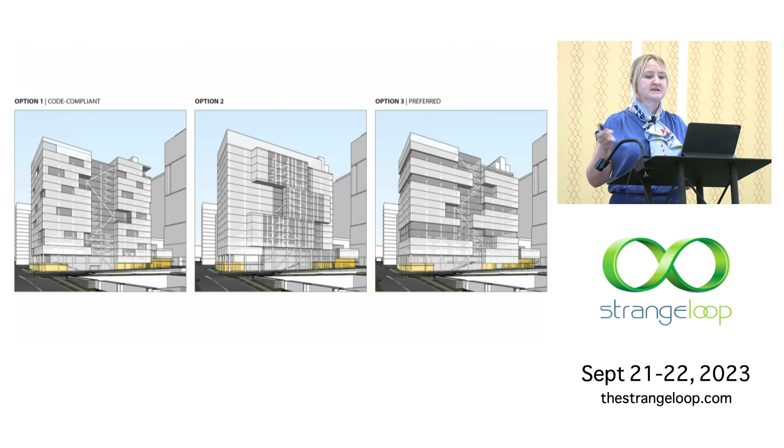Something that you'll commonly see is that 2 or 3 design options are identified upfront and then developed in parallel. And yes, having 2 or 3 design options is good, but you have to wonder what sorts of possibilities are unlocked if you could explore 100 or 1,000 options in the time it currently takes to explore one. And that idea is really at the crux of the work that we've been doing.

What if there's a better way to design buildings where the fundamental rules about how a building should manifest are encapsulated in a repeatable process that can be run in seconds, while still preserving the ability to express complicated and compelling forms. Nobody wants to live in a world full of boring rectangular boxes. So whatever work we do needs to support variety in form, and a lot of different aesthetics.

So I'm going to take a short detour for a moment and just talk about something that's provided a lot of inspiration for me over the past 10 years, which is trees. Monterey cypress trees in particular. Has anyone here ever been to the central coast of California, like Monterey or Big Sur, Carmel? Yeah, a lot of people. It's a really beautiful place.

And Monterey cypress trees are really common along the Central Coast. You really can't go far without seeing one. And I think it's one of the most beautiful trees on the planet. And what makes it beautiful to me is that the Monterey cypress, more than most any other tree, really expresses uniqueness by adapting to place.

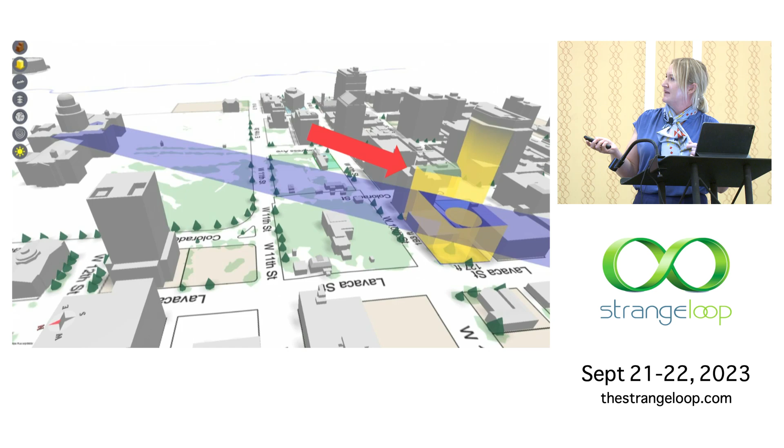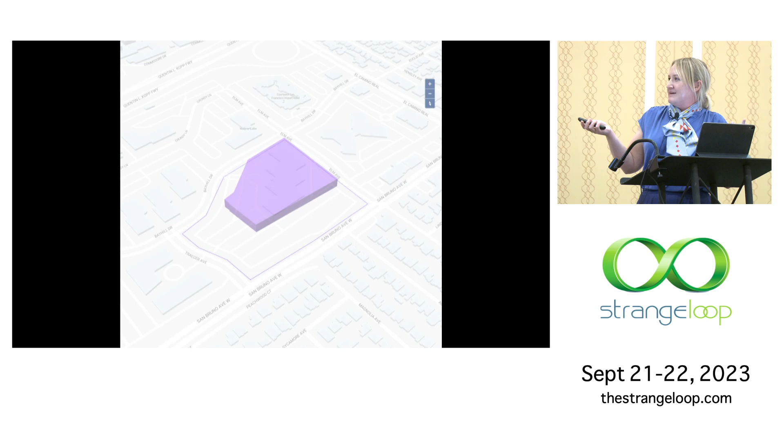You can see there's a cylindrical cutout because there's what's called a heritage tree. There's planes of different heights, and then you have this blue plane that's actually called a view corridor, because this building in particular was near the Austin Capitol building, and so you couldn't block the view there. But more often than not, they actually look more like this, a lofted polygon with varying setbacks from the lot edges.

So the next step after you understand site constraints is typically determining what's called the program for a building. This basically says how much and what sort of space should be included. Like in our case, how much desk area, how many conference rooms, what sort of conference rooms, what sort of amenities. Is this building going to have a cafe or bicycle storage, et cetera.

And then once you have your site constraints plus your building program, you can start exploring building form. And this is where architectural creativity really shines and comes into play. I'll do a deeper dive on this in a few minutes, but it's a really cool area.

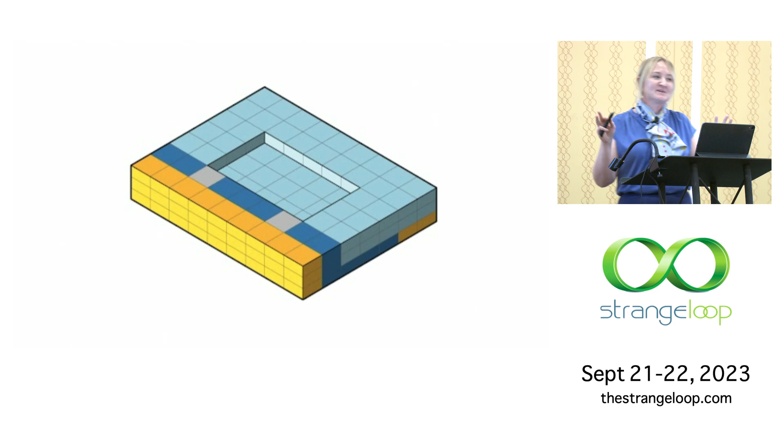At the same time that we're exploring form, we're also doing what's called a macro layout. This defines roughly what parts of the building are going to be used for what. Here it's color-coded: light blue is office space, dark blue is meeting space, yellow is amenity spaces.

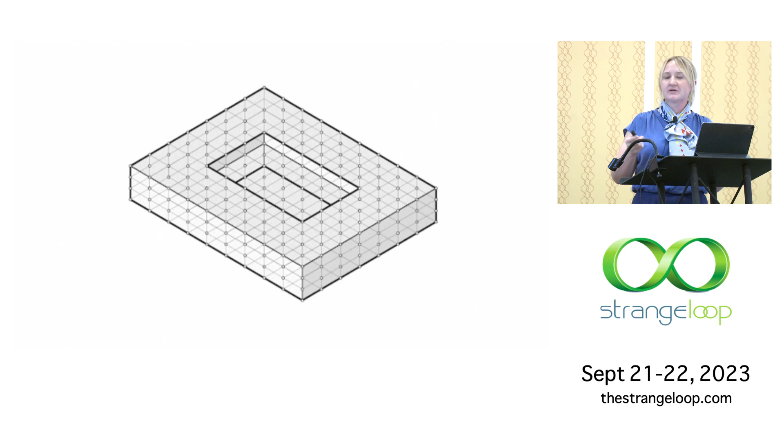Once a form and macro layout are identified, the next step is to establish the structural grid and structural member sizing for a building. You want to determine how large are the beams and columns. Next, totally separate from their physical locations in space, elements of the MEP system, so mechanical, electrical, and plumbing, are sized. What we're trying to figure out here are things like how large does an air handling unit need to be, or a boiler or chiller for a building.

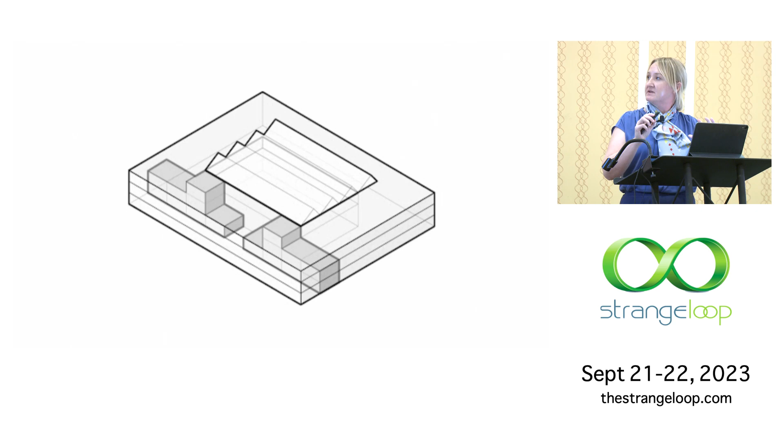Once we know how large the elements of an MEP system need to be, we can start to place them in physical space in what's called the building core, along with the vertical transport and stairs, so elevators, stairs, things like that. The next step is to take the secondary, smaller core items and place those in the building, typically adjacent to the larger primary building core.

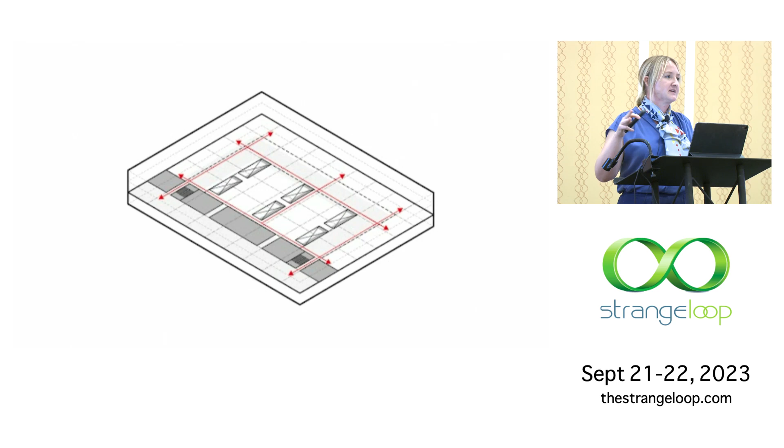With these major pieces in place, we can start to think about the layout of the space. We first start with primary circulation, that's the red lines here, and then we also think about secondary and tertiary circulation. Once that's designed, we lay out the space with the contents of the program. Because we're working on office spaces, we start with the workspace itself, the desks and where people actually get their work done. Then we layer on top of that conference space, amenity space, and other things like that.

And finally, there's typically a step related to seismic design, where the structural system has additional pieces added to it, typically either moment frames or shear walls, depending on the structure type. This is to protect the building in case of an earthquake.

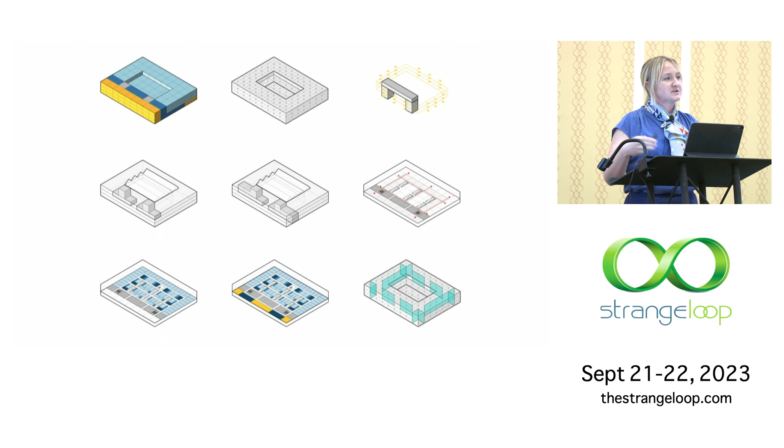While this is a pretty simple diagram, each step in this flow represents the work of dozens of people, each with very deep subject matter expertise. We don't have all of that expertise in-house at Outer Labs, so our approach was to partner with forward-thinking AEC practitioners and sit with them to understand their basic algorithms for doing their work, and then translate that into software.

Related to site placement, we worked with architects to see how they think about zoning, building placement, access, and things like that. Besides the buildable envelope, which volumetrically constrains what can be built on a site, there are also considerations like where should parking go? We live in a car-centric society. Where should the main entrance be? Where should things like a loading dock go?

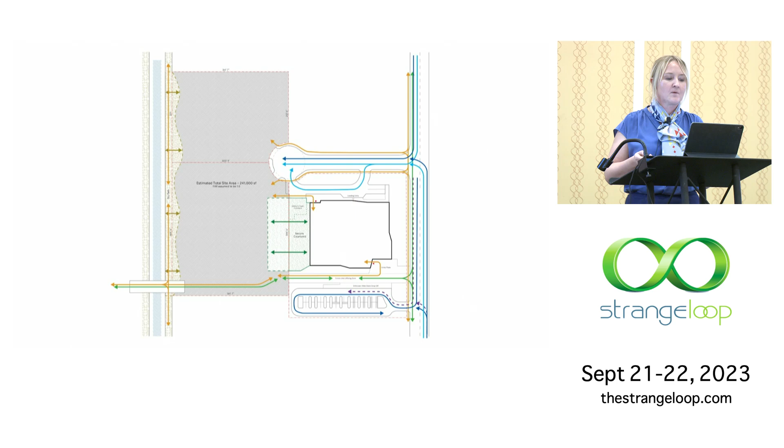When we talk about parties, there's literally an infinite number of them. It's just based on human creativity. But there are ones that you'll see over and over again in building design, like letter-shaped buildings, like T's and L's, O's and U's, courtyards, things like that.

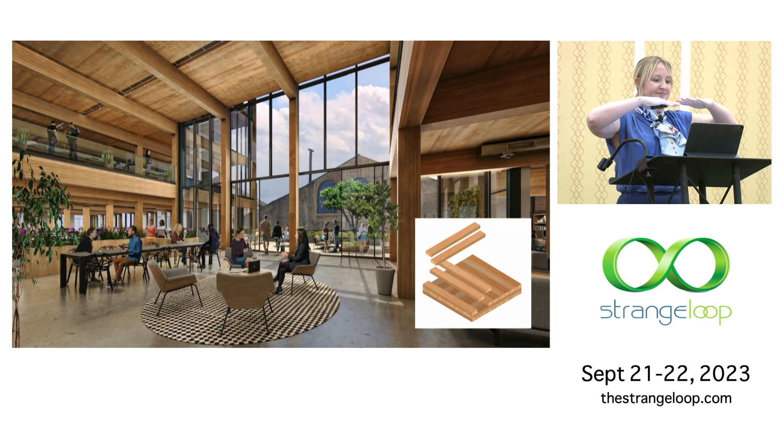Mass timber is kind of shown in here. The way it's constructed is multiple solid wood panels that are either glued or nailed together, and it's very strong, it's very stable, and it's also very low carbon. It's a great alternative to either concrete or steel if you're really going for a low carbon building. It's also really beautiful and creates this sense of visual warmth. It makes a nice space when you're in it, as you can see from this rendering here.

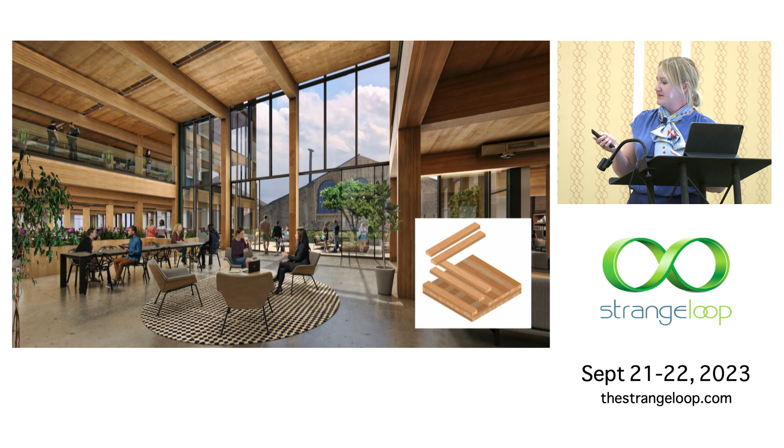And for either structural type, the basic process we followed was the same. Once we had a macro space plan for the building, we'd establish the column grid, assume certain loads based on how the space was going to be used, and then calculate the size of the beams and columns that were needed. Also, we calculate a set of metrics related to the structure, namely framing weight, which can be used as kind of a proxy for cost. In general, the lighter the structure, the less it's going to cost.

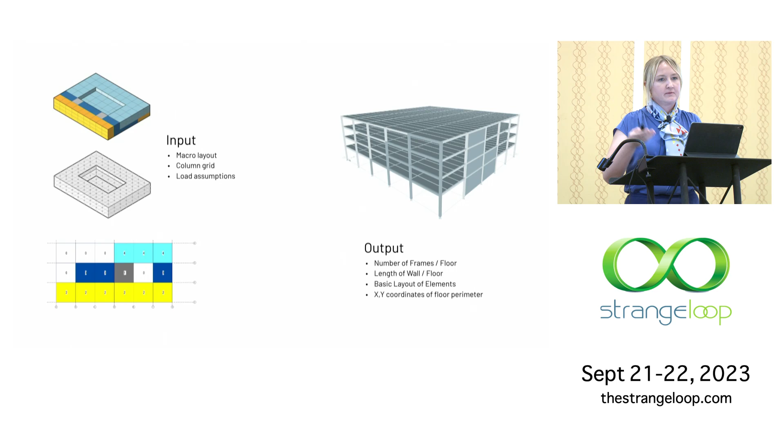And then another interesting metric we had was called structural irregularity. In general, the lower the irregularity score, the simpler and hence less expensive it is to build. And the last metric that we talked a lot about was embodied carbon, because as we were building out these tools, we wanted the platform to really create the best buildings possible that had the lightest footprint.

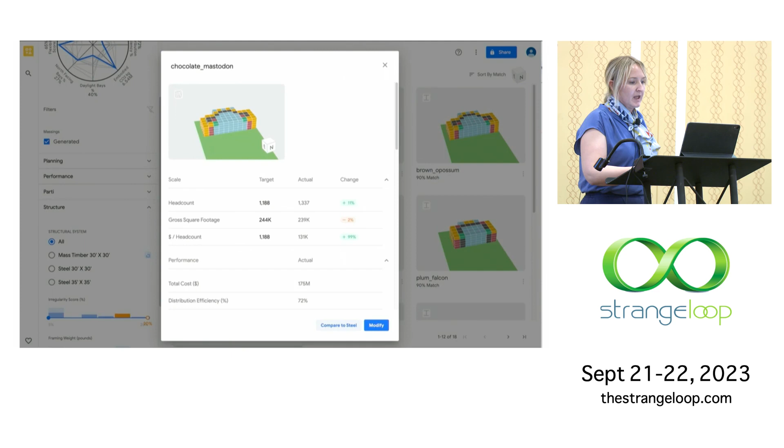So here is, let me start this video. This is a video looking at different design options related to structure. You can filter by the structure type. First we look at steel and then mass timber, and I can see metrics about it. And then here I choose a mass timber option. I compare it to steel, and you can see, side by side, how these two options are stacking up. The place you'll see the biggest difference is obviously in the embodied carbon metric, and it's much lower for mass timber.

For the building's MEP systems, we were less interested in optioneering, in the same way that we were for form, and even to some extent the structural system comparison. The client that we worked with to build out these tools had really strong guidelines around what good looks like with respect to HVAC, electrical, and plumbing. So in this case, it was more about modeling just a single path for designing each of these systems, and then reporting out metrics about them.

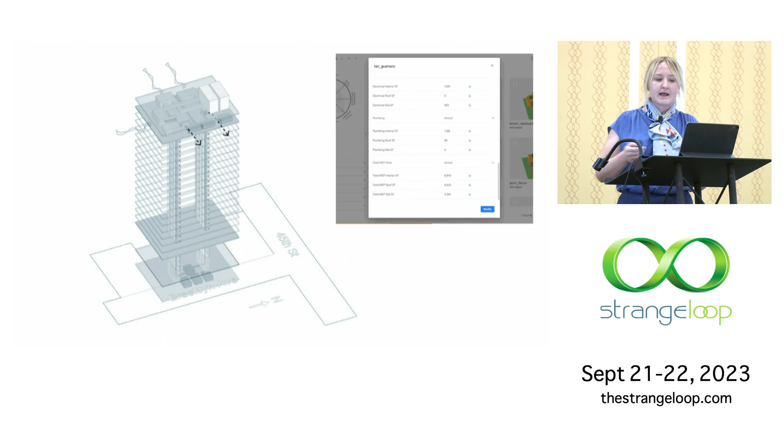And then lastly, we worked closely with design leaders from our client's firm and other interior architects to actually lay out the floor plates of the buildings designed on the platform. This particular client had a really strong sense of how space should be laid out and how it should function. So we worked with them to create basically parametric expressions of the building blocks that they would then use to lay out the space.

And using a library of assets to lay out space is not a new idea at all. But what is a new idea is making those assets able to grow and shrink to fit the space that they're going to occupy, and then also giving those assets enough intelligence to know how to arrange themselves within a building on a floor plate.

So when you bring it all together, what we have is a generative building design tool that creates rationalized building designs in just a few seconds. And the point of this is not just to have a faster design process, but really ultimately to arrive at a better starting point for building design. So let's see the whole thing in action. This video demo is about 3 minutes long.

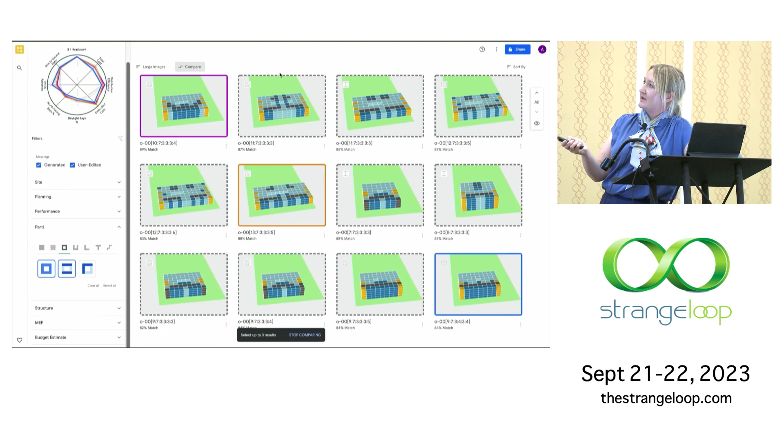And then if you want to just do a really quick side-by-side, you can select a few of the different options and then see, up here in the left, the spider diagram, you can see the different options overlaid. Or if you want to look in more detail and do a more side-by-side, deep dive, apples-to-apples comparison, you can go into your favorites and then see these buildings side-by-side.

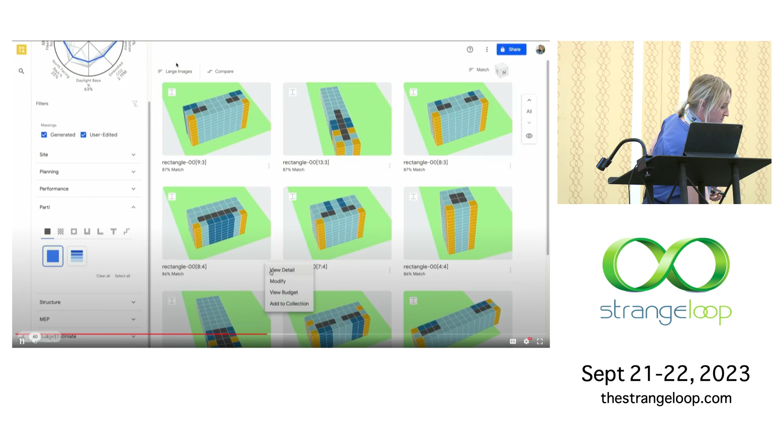Sorry, I think my video is experiencing a playback issue. Okay, seems like it's starting again. Maybe? Sorry, getting like the white spinning wheel. Okay. Yeah, so I hope the video stays playing.

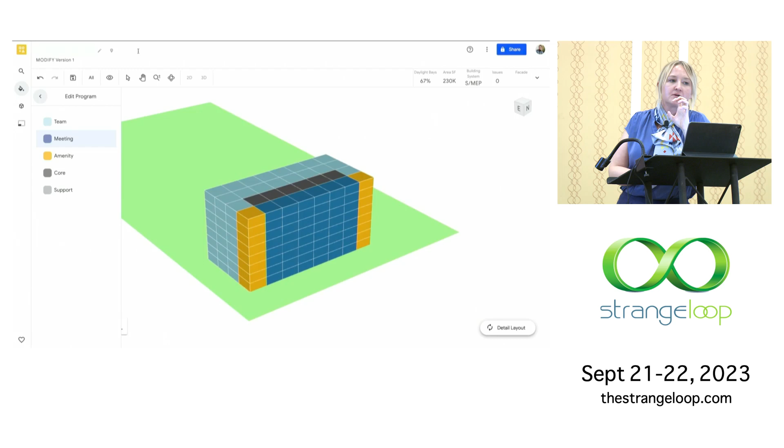Anyway, so what the tool is showing here is actually going in and modifying the form that is generated. So the idea here is really like the tool generates a starting point for you, and you can go in and change it and kind of go from there. So the first thing we showed was just changing the space categorization by basically taking some of the workspace, converting it to meeting space. Here you can actually modify the form by adding and removing voxels here. This is more just to show how it works.

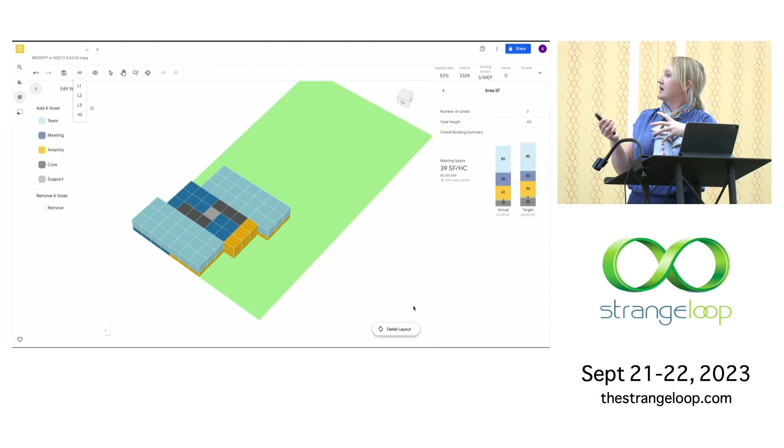And then once you are happy with the form that you want to pursue, you can actually go and do a more detailed spatial layout. So we go with one of the other options that was considered, this sort of like 3 offset bars. The first thing you do is plan out the circulation. You can go in and make modifications to it, copy it from level to level. And then once you have this set, you can actually move in and start creating a full spatial test fit here based on a target program.

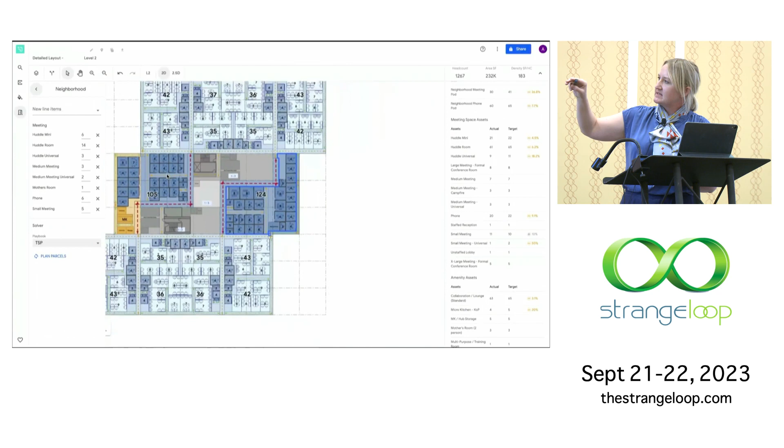So there's a constraint solver running under the hood of the program that takes in a target program and then produces many different outputs. You can go in to any local neighborhood and kind of examine its contents and give it a different target and ask the constraint solver to replan it. And then, as in life, there's always more than one good solution. So what you're seeing at the very end here was the tool presenting a few different options that a person could then choose from.

Okay, so now that you've seen the whole end-to-end process, I wanted to do a deeper dive into form generation because our team found this to be just a really interesting and challenging area of the work. So like I mentioned earlier, when someone thinks about architectural creativity, you often think of form. The practice of architecture encompasses a very wide range of things, but physical form is really one of the most visible aspects of architecture. So I'll start this video.

So one of our early experiments in form generation took the form of an optimization problem. So we set targets for things like square footage, window to wall ratio, daylight access, and more, and then kicked off a routine to explore different forms. And in this video, you'll see that there's the smallest atomic unit that we're working with, a block or a voxel. This represents the smallest spatial change. And we elected to go with what's called a building structural bay, which is basically the space between columns, for this.

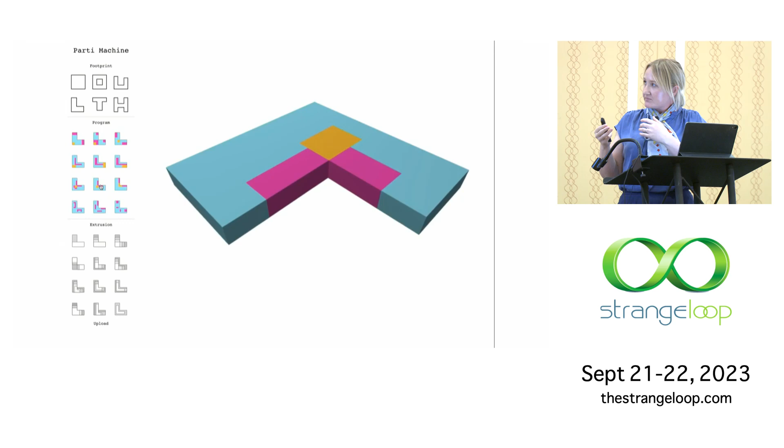And then finally, I guess this is just showing a few more explorations of form. Kind of mesmerizing. And then finally, we would apply a vertical extrusion element to it. And so what you're seeing is this model exploring parametrically, trying to hit space targets and program targets. And with these explorations, we started to get a lot closer to architect-approved buildings, and ultimately ended up going this way in the tools that we built.

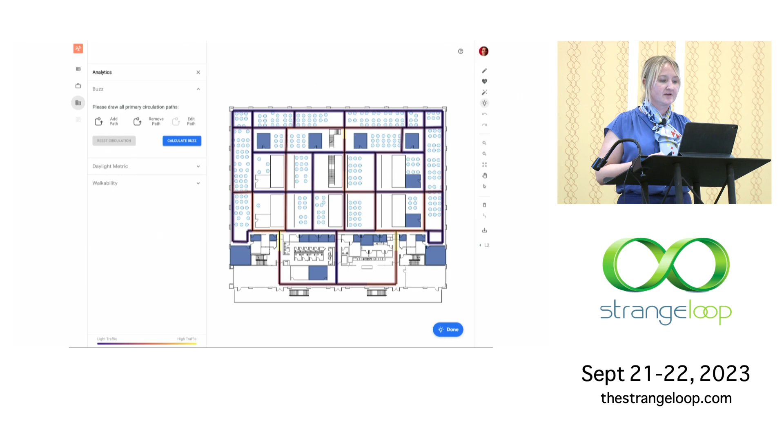But even in this first iteration, we had a lot of really interesting, valuable insights, and it sparked really interesting conversation. And we could obviously take this a lot farther, and I hope we have a chance to in further iterations of the tools. And metrics are so important that we don't actually frame this as a generative design platform, but rather as a data-driven design tool that provides information that can be used to quantify a building design and ultimately produce a better building for occupants.

And as we rolled this out to users, it was really cool to see the collaboration that it unlocked. So last year we held a multi-day on-site charrette where project teams made up of cross-functional disciplines like architects and building engineers and interior planners all came together and used the tools in real time to develop building designs. And one exciting thing we observed, I remember it very vividly, there was an architect and a space planner sitting together and making adjustments in real time about the space.

So they'd say, oh, what if we bumped out this wall and added an amenity here? What if we pulled this wall in? And so they were in real time running what-if scenarios that, if this were the more traditional design process, those iterations would have taken days or weeks, if they would have even happened at all. So that was really cool to see.

And then, one big takeaway from the work is that while it's conceptually very interesting to have a fully automated generative design process, the value comes not necessarily from the end result, the designed building, but rather in providing practitioners, these subject matter experts like architects and building engineers, tools so they could quickly explore the questions that they wanted to answer. In the scenario that I just talked about, it was really cool to see the architect and space planner going back and forth, collaborating on how a particular region of a floor plate should be functioning.